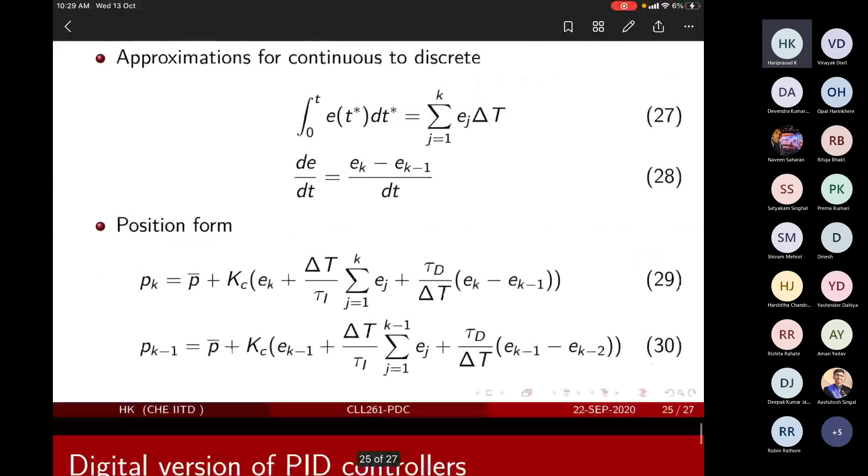Okay, so the pending topic from the controller part is what we are going to cover in maybe another 5-10 minutes. It's quite simple. It is the digital version of the PID. Till now we have all learned about the transfer function form of PID: 1 by tau I s plus tau D s. So this is the transfer function, which essentially means that it is in the Laplace domain, or again, as I told, continuous time domain.

Now, as I told, you would either implement this as an electronic circuit, or, because this is a rule, right? You take an error, do a transformation, and give an output. So the one way is an electronic circuit. The other way is to do it by means of software, a distributed control system, which is kept somewhere in a corner of a plant, where you take out the signal, do this conversion, do the algorithmic transformation, find out the output and send it back.

Of course, a computer knows only bits and bytes, right? It doesn't know what a continuous signal is. That's very important. When you bring in this big guy, which is supposed to help us, it's also making our life a little difficult because it doesn't understand continuous time. It will always work with discrete time, because a computer always works in bits. So you cannot do any continuous transformation. The simplest way is to convert all of them into discrete time.

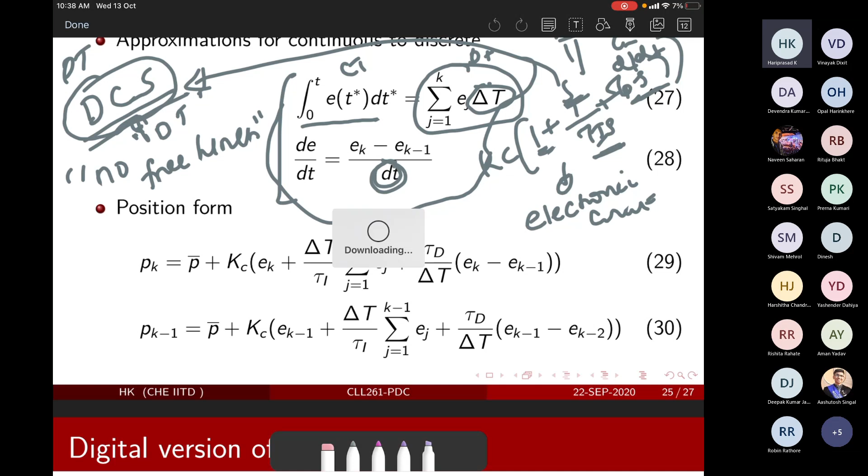Yeah. So it is the simplified. The position form essentially means that it is the exact discrete time version of the continuous time model. So you see, KC, EK. This evaluates the controller output at the kth instant. This k could be 1, 2, 3, 4, and this rule, this controller algorithm. You would see all of these terms when you learn more about advanced process control. Sorry. So this particular algorithm or rule is the exact discrete time formulation. So your integral term is approximated and derivative term is approximated.

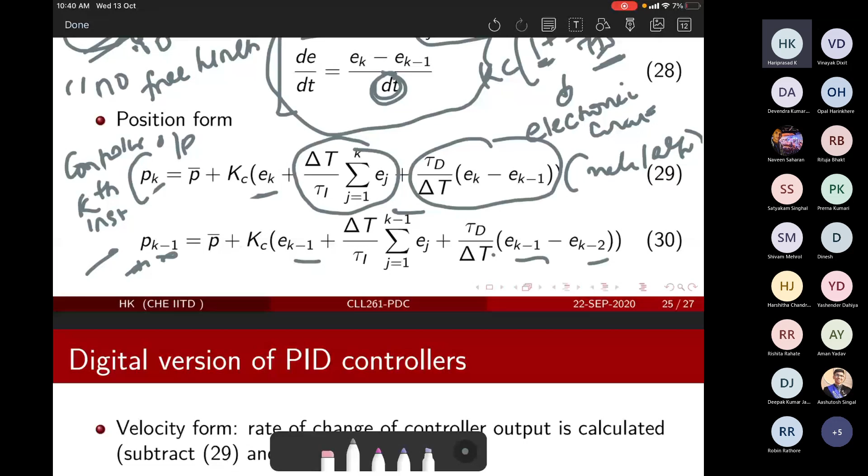And the second is a very interesting term. It is called velocity form. So what does velocity form mean? Look at the controller structure. In the velocity form, you take the position form at two subsequent times and subtract them: 29 minus 30. This is the position form at the kth instant. The other one is the position form at the k minus 1 instant.

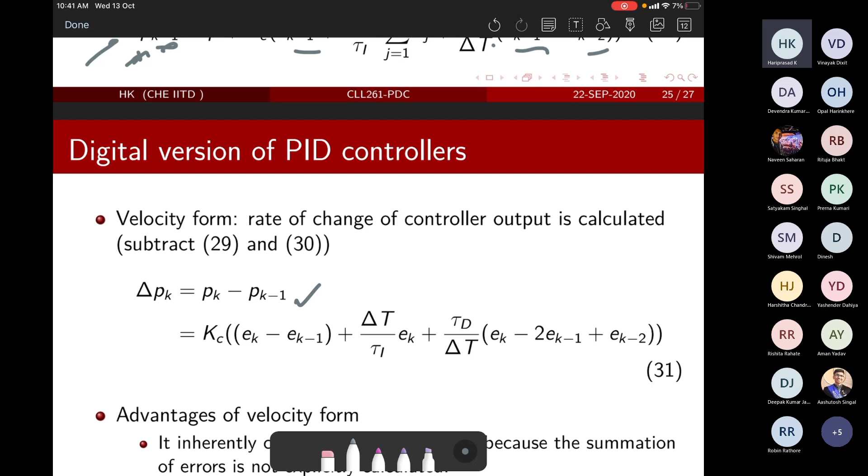And the velocity form digital version of the PID controller is basically the difference pk minus pk minus 1. So this term would go away, of course, and the key aspect comes in the integral term and the derivative term. In the integral term, in the first case you have integrated till k and you are subtracting the integration till k minus 1. So your integral term will only contain one term, which is ek.

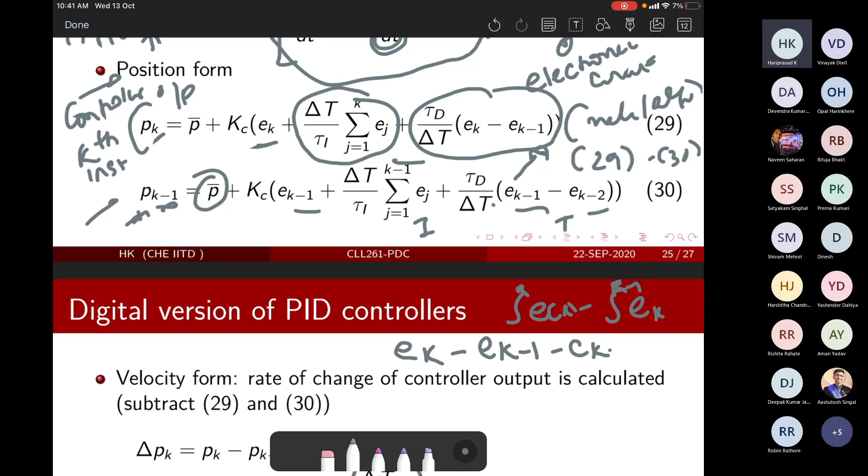Why? The derivative term would contain multiple terms. It is ek minus ek-1, minus ek-1, plus ek-2. So ek minus 2ek-1 plus ek-2. This is the velocity form of the controller. You can choose one of these. And there are certain advantages of the velocity form over the position form.

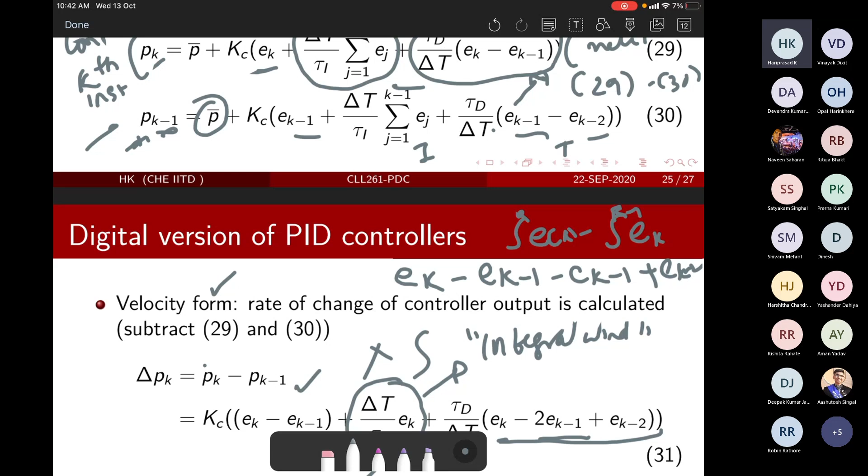Why? Because the integral term has gone away. It's not there. And the integral term is the main reason for integral windup. Because there is no integral term here, there is no integral windup, but it contains implicitly the integral action between two successive steps. And also, most importantly, you have to see here: the left hand side is pk minus pk-1, which is delta pk. Your output is basically delta pk.

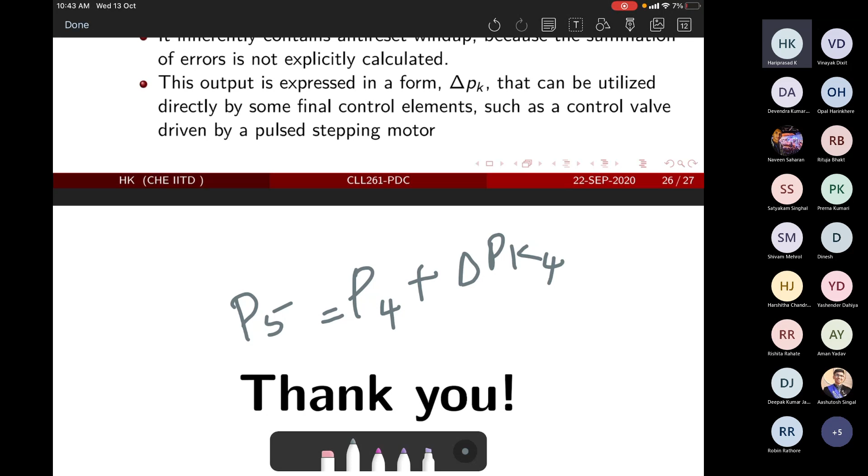So what do we mean by that? Let's say your controller is updated at the 4th instant and you need the 5th instant. You are not recomputing anything at the 5th instant, you are just adding a delta pk. So p4 plus delta p4 gives you p5, and p6 would be p5 plus delta p5. So what are we doing here?

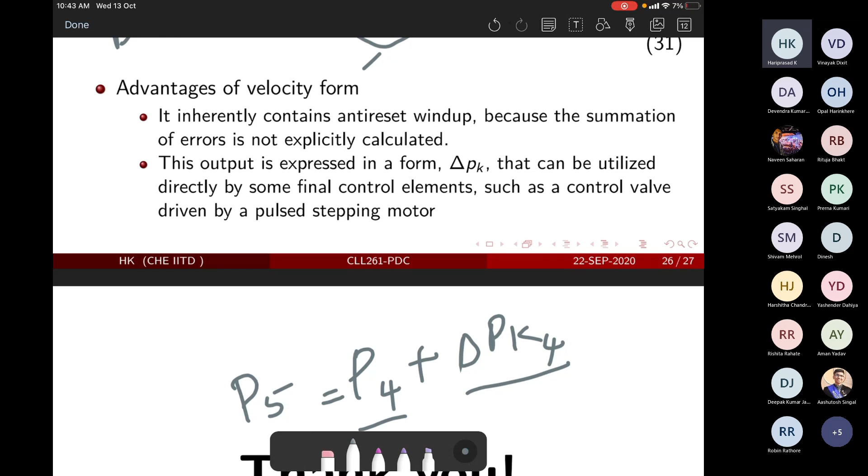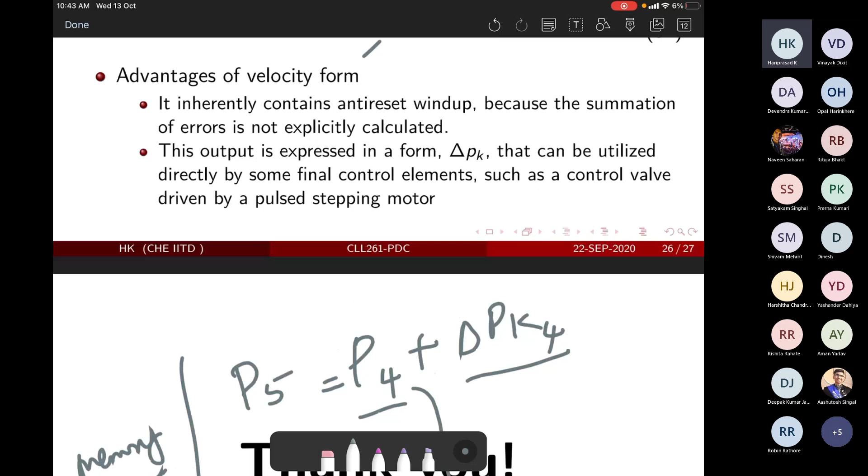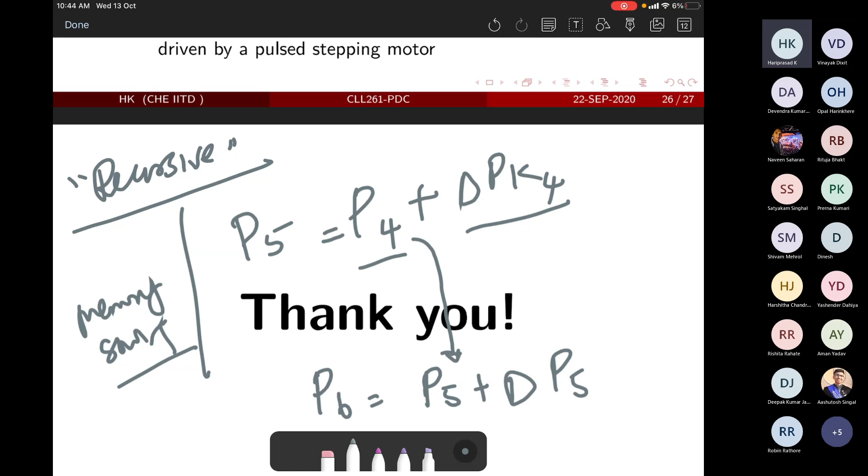This essentially means that you are utilizing your previous calculation. So some level of memory saving, because you already computed it, so there is no point in recomputing anything. These kinds of algorithms are called recursive in nature. It reduces the load of the overall computation, because you have already computed something and the next step is just an addition.

So why is it good? You have to look at the customer of the controller, which is the control valve. For the control valve, P6 is coming in and your stem position is already at P5. And delta P5 is just saying you reduce this. So it gives you a more continuous feeling of operation.

While when you compute P5 and P6 independently and send them to the control valve, P5 is implemented and P6 is like a discrete instant. So if it is a ramp or a big change, the load on the control valve would be more, because these are all discrete instances. The other is a small addition on the existing one, so here the transition is smooth. While if it is position form, it may be a little bit of a hard transition.

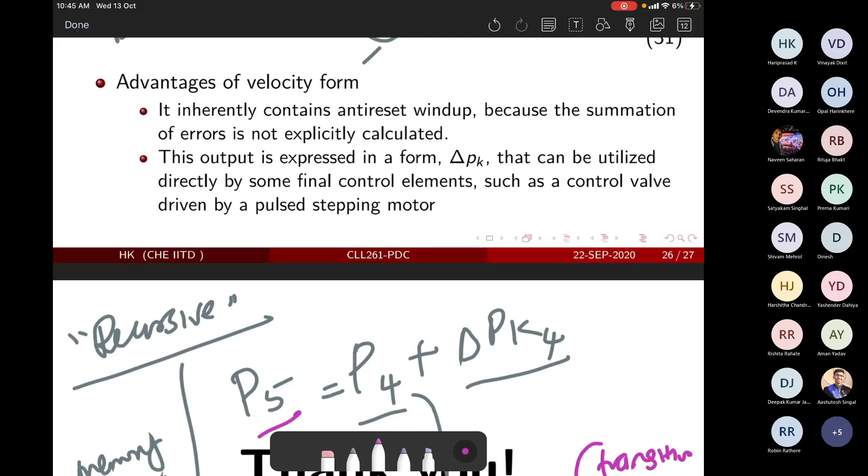Okay, so this is what I wanted to cover. Any questions on this? No, sir.

Good. So now we will move into the overall control system design, which means you are going to use all your skills in aggregating things together. Let's look at an example and list down the overall components in the control system. Two streams come in and one goes out; assume it's a mixing problem. Here you put an analyzer transmitter going to an analyzer controller, you give your set point here, and you might have your I to P here.

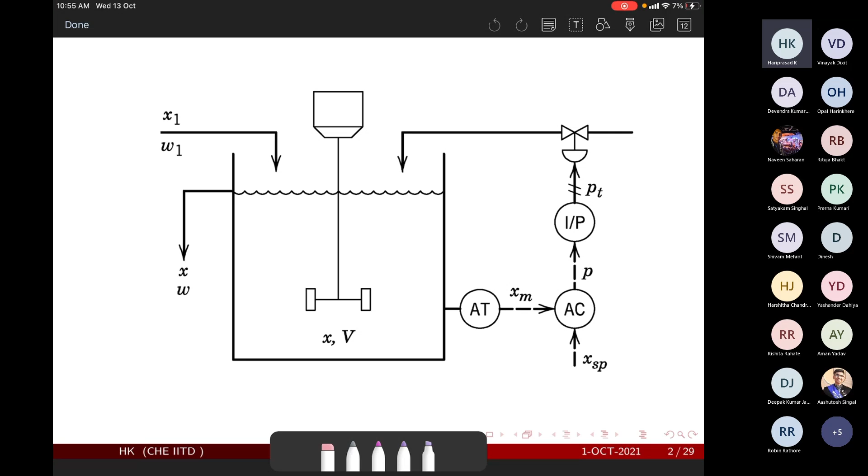So I hope my document has opened now. Let me see. Did I miss anything? Let me check. Transmitter we have seen, controller we have seen, I2P we have seen, control valve. Okay, everything has been counted.

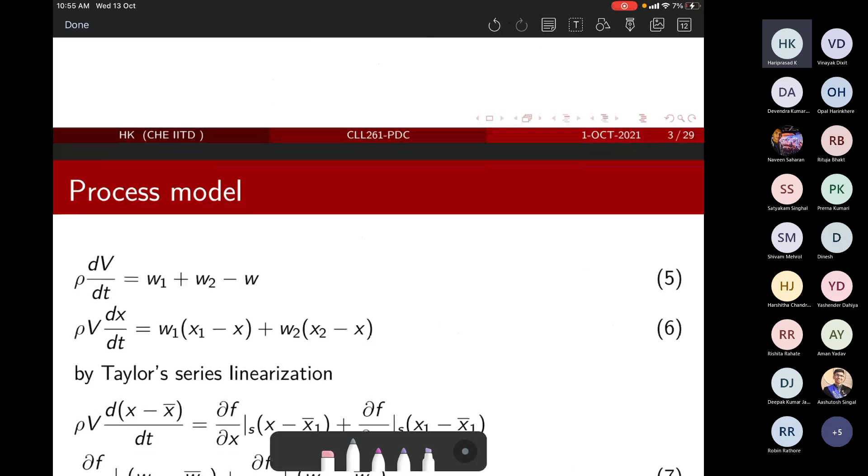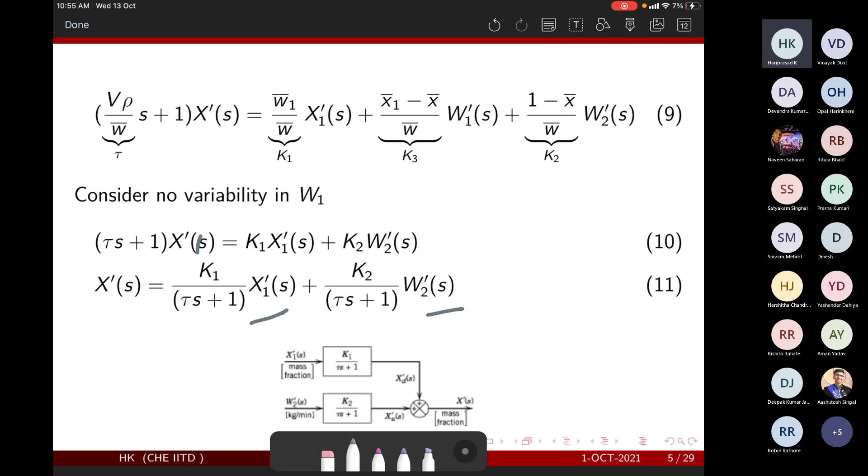So I am just leaving the initial part of it. The process model development you already know. You write the mass balance, linearize, take the Laplace, and you get two components, one corresponding to W2 and one corresponding to the disturbance. Here is where we do control, because this is the manipulated line, W2.

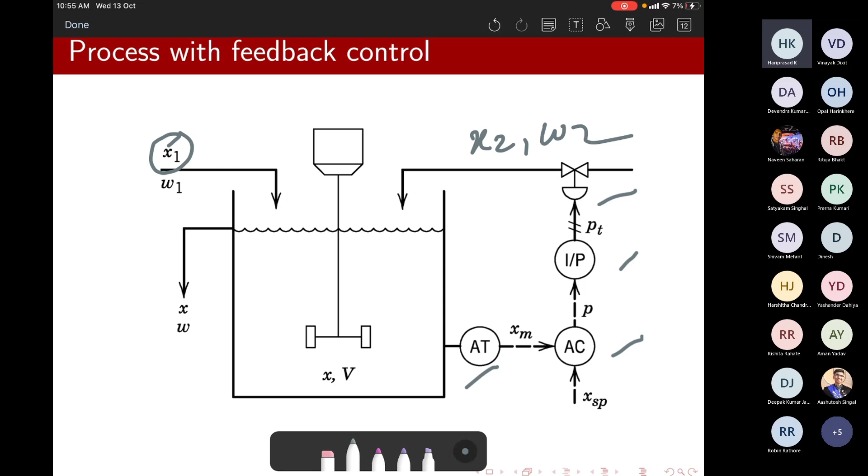So this is X2, W2. Okay, and here is where the disturbance comes in. I think so. This guy is corresponding to the disturbance because you don't have any control, assuming no variability in W1. So you have two things: the flow rate and its composition. So you assume that the flow rate is somehow constant, but it's X1, the composition of a particular component in the flow, that is varying with respect to time.

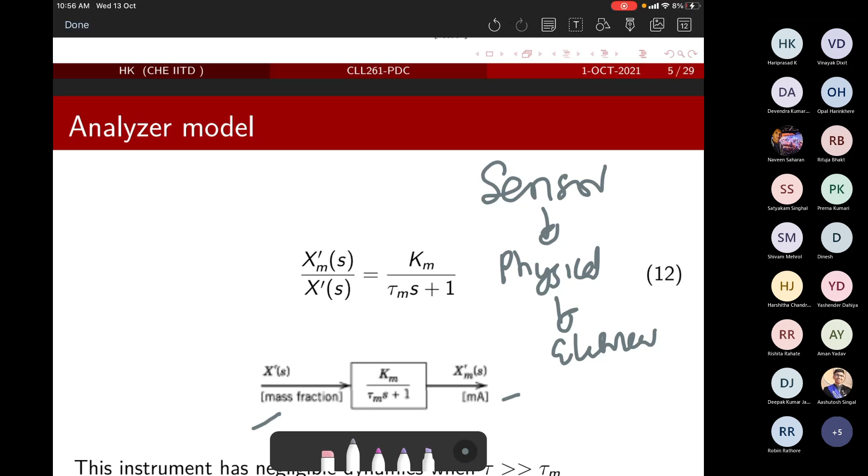Okay, so now let's look at each of these components. So analyzer. What it does, it takes the original variable and converts it into milliamps. So what is an analyzer? It is the sensor. So the sensor takes physical inputs, okay, and converts them into electrical. So oftentimes the sensor, okay, so what are we doing?

So this is like a transformation from one to two, and let's say the composition is maybe, I don't know, 2 gram per liter. It would give rise to a corresponding signal. Let's say it is 5 milliampere, and let's say it is 5 gram per liter. Okay, so it should correspondingly increase, and you might get maybe 8 milliamps or whatever.

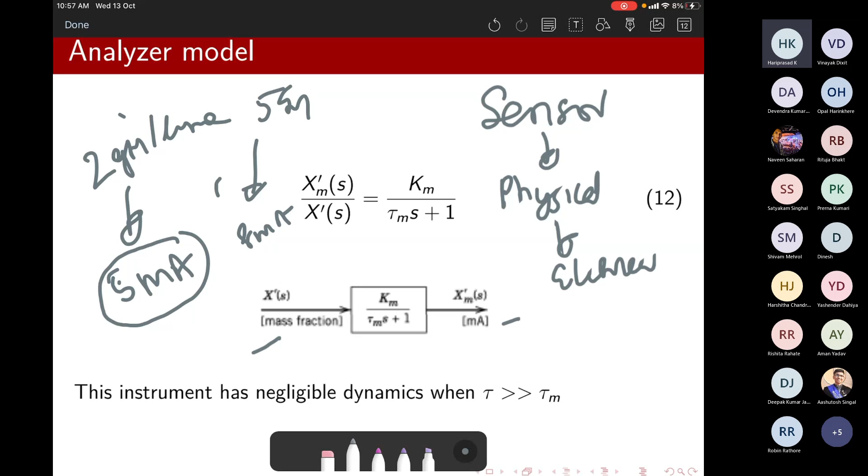So what are we trying to say by the analyzer or the sensor model? What is the output of the sensor for a given input of the physical variable? Because it takes the physical variable in and takes the signal out. So there are various ways. So how do you get the sensor model?

That's a big question. So when you buy a sensor, oftentimes they would give you an instruction sheet. They would most likely describe the dynamics of the sensor. So why is there a dynamics of the sensor involved? Okay, so that's a very important thing. See?

So let's say it's like this, right? So let's say this is a heating water bath. You put a thermometer here. So this is of course at 100 degrees here. This is the thermometer. And what would you see as a function of time? This is time. So eventually, if your thermometer is working fine, there is no problem. It would definitely show 100 degrees C.

But you are inserting it from an ambient temperature. So let's say this is 28 degrees C, this is 0. Okay, so initially, you put a stopwatch and start recording this thermometer measurement. This is what you would do possibly in the next lab coming next semester. Okay, so at time 0, it is the ambient temperature. Maybe 1 second, 2 second, 3 second, maybe 4 second and 5 second.

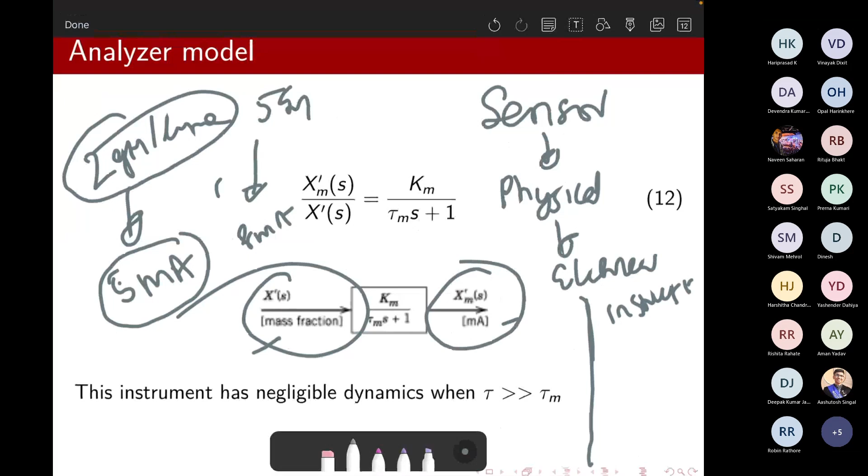Okay, so now what's the time? 11. Okay, good time. And even my particular files got automatically closed. Just to add a few things.

Okay, so we will stop here and next we will look at how to model these particular components, things like the control valve, I to P, and finally close the entire loop. Just a second, I'm sorry that I am taking more time, but I am just closing it down. Really painful. So in the subsequent classes we will look at the control system as well.